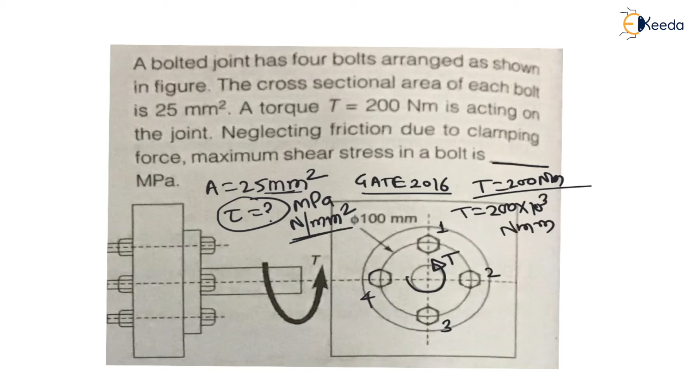Now if you see carefully, here the bolts are subjected to only secondary shear stresses, that is torsional shear stresses, and the torque is acting in anti-clockwise direction. Now let us draw a free body diagram of this. Here I am minimizing the image of the question so that we can solve this question.

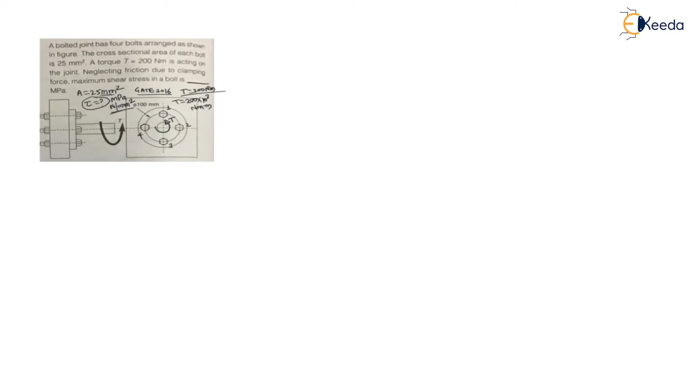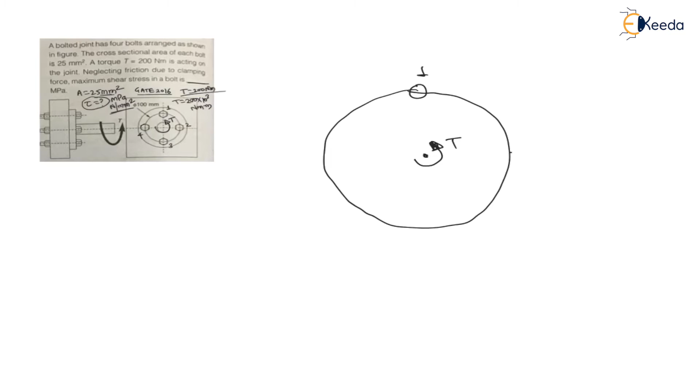See, the bolts are arranged in circular fashion. Let us say this is the circle along which the bolts are arranged, right. And let us say at center torque T in anti-clockwise direction is applied. Now on top there is bolt 1, at rightmost corner there is bolt 2, at bottom bolt 3, and in leftmost corner there is bolt 4. These are the 4 bolts.

Now here torque is going in anti-clockwise direction, therefore to cancel this torque we have to apply clockwise torque on each and every bolt. Torque is nothing but force into perpendicular distance. Therefore if I consider R1, that is radius 1, for R1 P1 must be perpendicular. Only forces perpendicular to the radius create torque, right? Therefore see P1 is creating clockwise torque, then no problem.

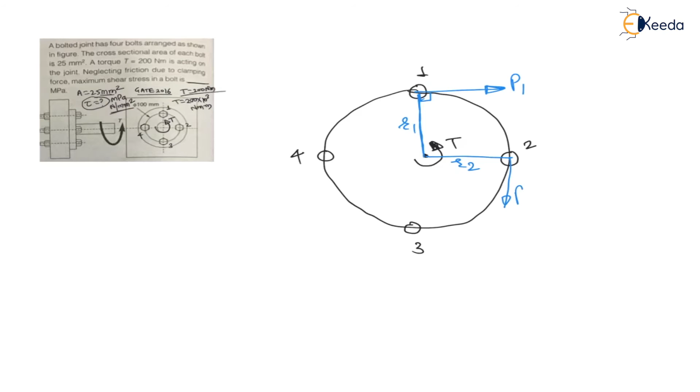Now on bolt 2 at radius R2 there will be P2 which must create clockwise torque. On bolt 3 at radius R3 there will be clockwise torque of P3 force. On bolt 4 at radius R4 there will be P4 like this, right? And all forces are perpendicular to radius, and they all will create torque in clockwise direction to balance this anti-clockwise torque, right?

Now here definitely R1 is equal to R2 is equal to R3 is equal to R4, right? And as P1, P2, P3, P4 are secondary shear loads, this secondary shear load is calculated as K into R, right?

Therefore if I want to find P1, it is KR1, where K is constant, and K is calculated as K is equal to torque divided by R1 square plus R2 square plus R3 square plus R4 square. This derivation we have seen in theory lectures, right? And if I want to find P2, P2 is KR2. If I want to find P3, it is KR3.

P4 is KR4. My dear students, K is constant and radius is also constant for each and every bolt. That is R1 is equal to R2 is equal to R3 is equal to R4 is equal to R. Radius for each and every bolt is same. Therefore, due to symmetry, the secondary forces are same. That is P1 is equal to P2 is equal to P3 is equal to P4 is equal to, let us say, P. All are same due to symmetry. That is, due to symmetry, force in each and every bolt will be same, right?

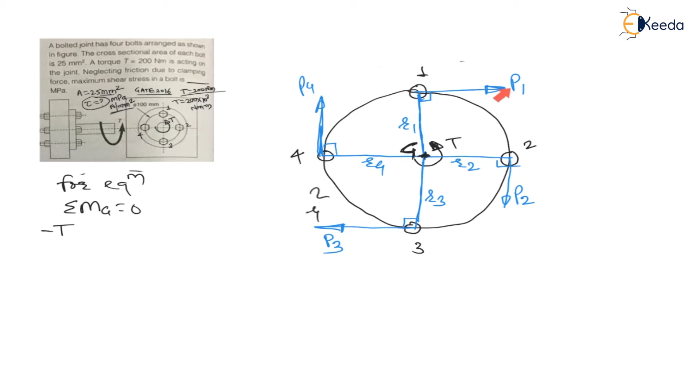Now for equilibrium, summation of moment about G point, the center, must be equal to 0. At G, there is anti-clockwise torque, therefore minus T. Again, P1 into R1 is creating clockwise, P2 into R2 creating clockwise, P3 into R3 creating clockwise, P4 into R4 creating clockwise. Therefore, all will be positive, that is minus T plus P1 R1 plus P2 R2 plus P3 R3 plus P4 R4 is equal to 0.

Now P1, P2, P3, P4 all are same, and R1, R2, R3, R4 all are same. Therefore, minus T plus 4PR is equal to 0, so 4PR is equal to torque. From this, calculate the unknown. Here force P is unknown, therefore P is equal to T divided by 4R. Torque is given 200 into 10 to the power 3. It is in Newton mm, divided by 4 into radius.

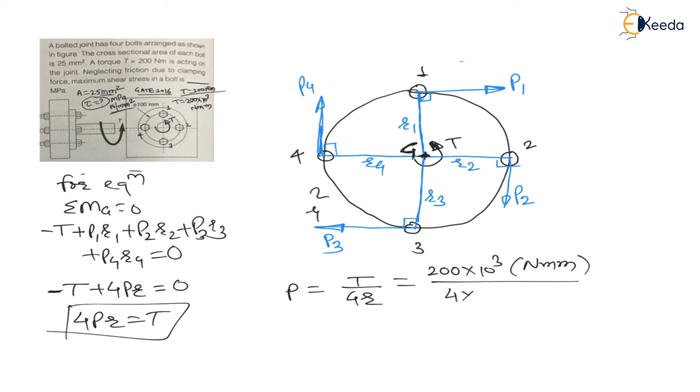Now see, what is the radius given for a bolt? Here it is mentioned 100 mm. That means the diameter is 100 mm, therefore the radius will be 50 mm only. Right. Therefore here radius is 50 mm. mm will cancel and it will remain in Newton. Therefore, calculate the force P. Force P will be equal to 1000 Newton. This will be your answer.

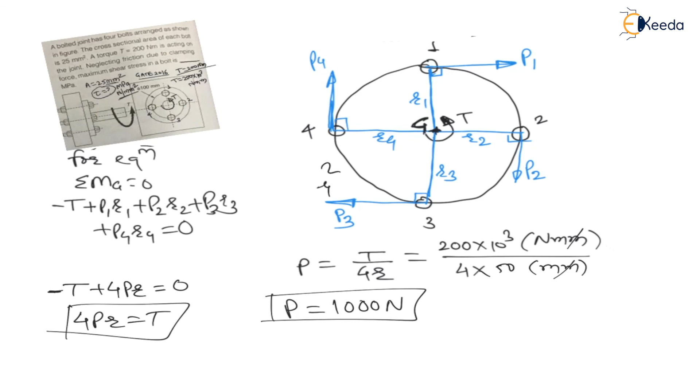But my dear students, the question is to find shear stress. Therefore, shear stress is equal to force divided by area, which is 1000 divided by area given 25 mm square. If I solve this, I will get 40 Newton per mm square, which is nothing but 40 MPa. Therefore, in fill in the blanks, you have to type 40 MPa.

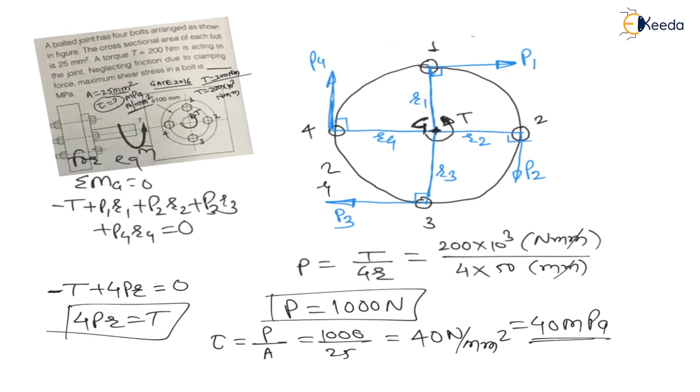Now, come to the question. In this question, see, there is a fill in the blanks, right? They are asking what is the shear stress in bolt in MPa. So, in this bracket, you have to type answer 40 for getting full marks.